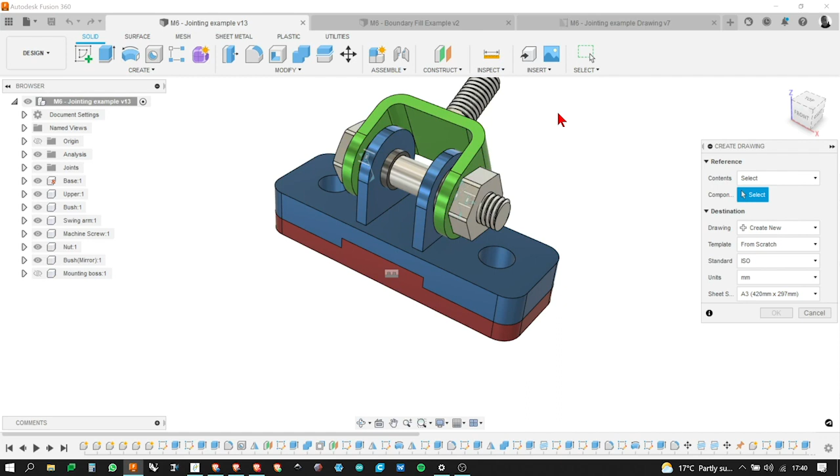So what I'm going to do is click on one of these. I'll click on the blue one to select it. Pretty straightforward how you decide what you want to bring into your drawing. And then in terms of destination, we've got create new, or you can add it to other drawings or a batch of drawings should you wish.

There are different templates. We're not going to look at all of that now, but if you're working for a company and they've got their own template, their own particular way of working with drawings, you can bring in a template at that point. You've got different standards - ISO or ASME, defaults to ISO.

Units, millimeters or inches, and the sheet size. This is quite an important one at this stage, to decide what sheet size you want. And again, it might be based very much on what printers you've got. If your company doesn't, or you don't have access to a large format printer, you may be reduced to using A4.

But if not, A3 is a pretty good one. A lot of printers will do A3, so that's quite a standard one. And I think it defaults to A3, in fact. What you do have, which is quite handy, is two A4s, one portrait and one landscape, which is quite handy.

So I was saying the A4 has got portrait and landscape at this stage, which is quite handy. Top one's the portrait one, so it's length first, width second, or whichever way around it is, portrait landscape. But we'll go with A3 for this one. So those kind of things you need to think about before you click OK.

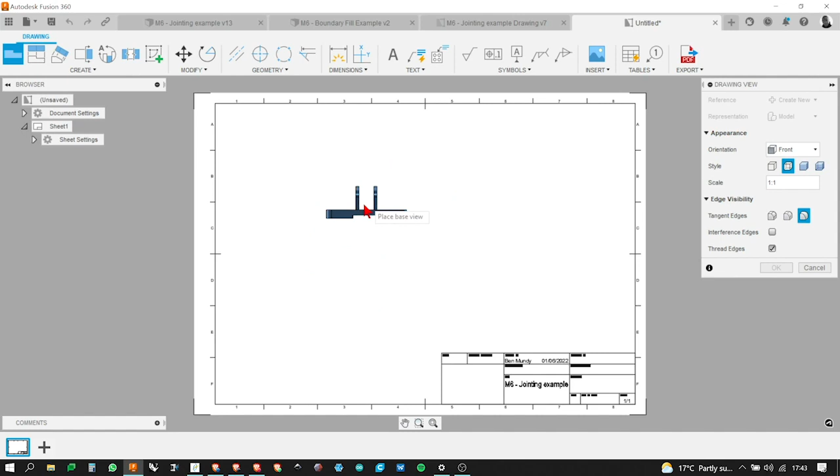But what you get as a first step, you'll get your component sort of floating around somewhere. And basically you can click to place it somewhere that you want. But before you do that, we need to have a look at this dialog box over here.

Firstly, orientation. At the moment it's looking at the front view. This is when we place our first view of a component, we're basically creating a base view of which all the other views will be projected from. So we need to think about what is the most logical view for your base view.

And if you want to change the view, we can change it to a top view, so looking at it top down. Change it obviously to a right left view or a side view. Home view, as they're calling it, is an isometric projection.

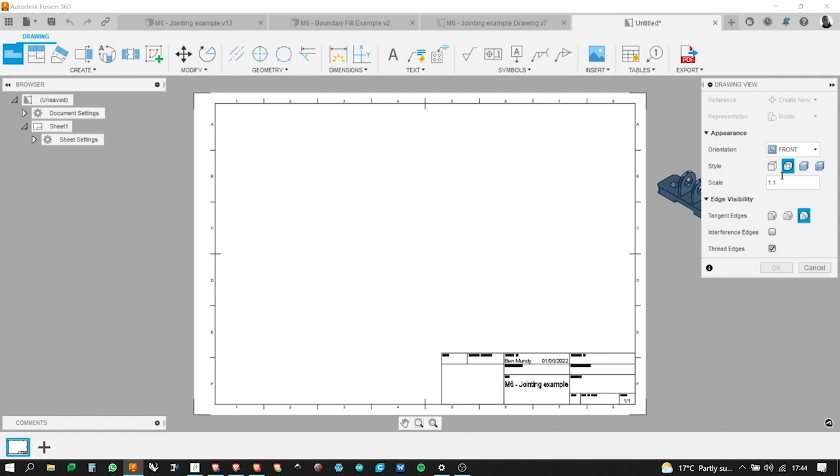Generally speaking, at this stage, you're going to be doing an orthographic drawing. So you're going to have a top view, a side view, maybe a bottom view, depending on what you need to describe the shape. In this instance, I think probably the front view is absolutely fine for this particular object.

Beneath it, we can have a look at these later as well. We've got style. At the moment, it's showing as a fully shaded object with geometry lines. But you can have it as wireframe with hidden lines, wireframe without hidden lines, shaded without geometry, and shaded with hidden lines. Generally speaking, it will default to wireframe with hidden lines, which is kind of what you want for a technical drawing, generally speaking, and that's what we'll go for.

But you can go back at a later date and change that if you want to. So we can change most of this, or all of this, if you need to. The next thing to look at is scale.

So when you're thinking about laying out a drawing, you have to also think about you're going to need space around each projection for dimensions, for notes, information. So you need to think about some idea of how you're going to lay out a drawing beforehand.

But if you want to make it bigger or smaller, we can just go over to the scale dialog box and go to the three dots next to it, and we can change it from 1:1 scale to 2:1 if we want it to be double the size, and obviously bigger, or we want it to be 1:2 and make it half the size. So we can think about the scale of the object in relation to the size of your paper.

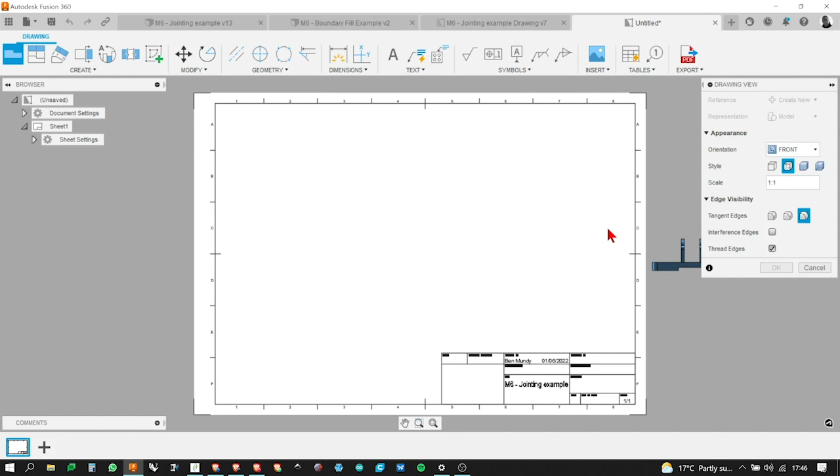Things like tangent edges and edge visibility basically involve removing geometry lines where you don't need them. I tend to leave it to the default of removing unnecessary geometry lines.

Because with technical or engineering drawings, you can get too many lines and it can get hard to look at. So the default is tangent edges, sort of clean with all the geometry lines removed. Thread edges will highlight at this stage, but you can remove thread edges if you've modelled your threads and you don't want that modelling to show up in your technical drawing.

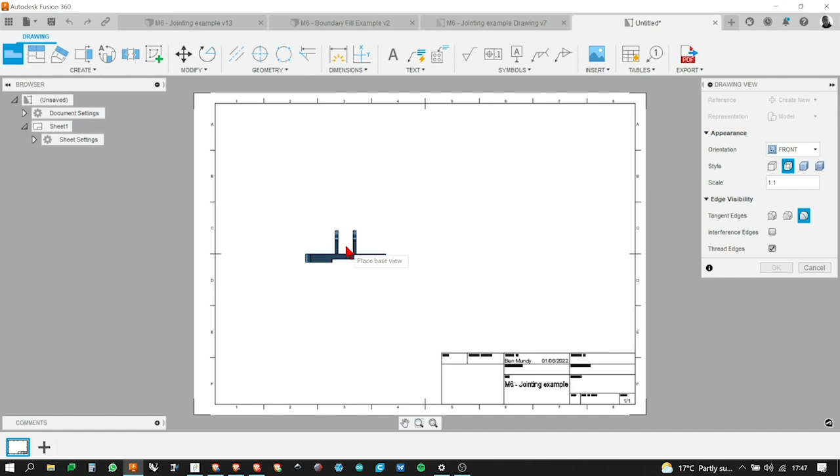But once you've decided essentially what orientation your base view is and what size it is, you can click somewhere on your paper and choose where you're going to put it. You can change the position very easily. Don't have to get it right now, but let's put it somewhere.

So I'm going to click and pop it here, and click OK. So there is our base view. We can see we've got a wireframe representation of the front view, and we can see we've got some dotted lines to show the holes running through it.

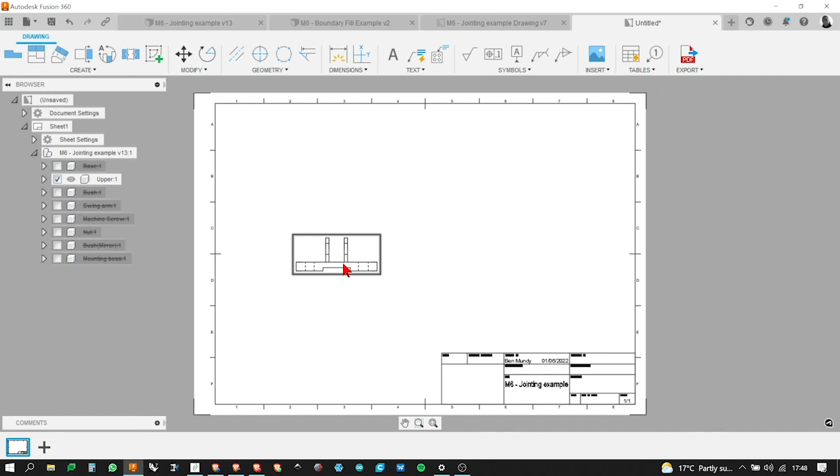And I think these should be dotted lines, but actually they're too short. That piece is too short to show that as a dotted line. So that's a slight thing to be aware of: if you've got a very short line, it won't always display as a dashed or dotted line. Anyway, so that's our base view.

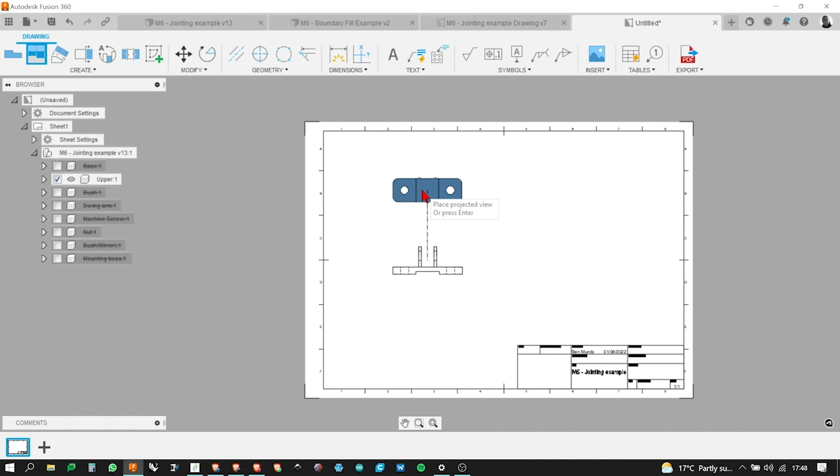Okay, so if you look over here in the Create menu, the very first thing we're doing is creating our base view. From that, we're going to create our projected views. So if I go to the next icon along and click on that, and click on the parent view, the base view, once, and move my mouse, it will take the projected view in the direction you're moving, which is horizontal, vertical, or diagonal. There we go, and it will give you an isometric view.

As you move it around, it will change the view as you go from left to right, top to bottom, diagonally, trying to be helpful. So for this one, I might have a bottom view, a top view, and a side view. I'm going to click once there, move it again, click once there, move it again, click once there, move it again.

And then I might put one of these over here somewhere, an isometric view over in the corner. It's quite handy to have that because someone can instantly get an idea of what the form is. All the information will be in your dimensions and orthographic projection, but it's nice to have that there, so there's instant recognition of the kind of nature of the shape.

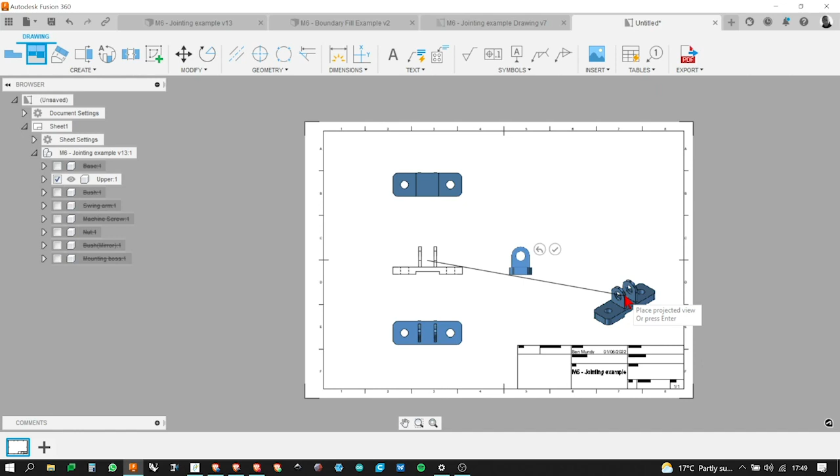So I'm going to click OK, Enter, and then to finish my views, I'm just going to click on the little tick next to it. And then we've got our views. If we want to change the way any of these look, say I want to change this one...

I want to get rid of all the hidden dashed lines because it's a bit complicated to look at, so I can just double click on it and it will change the appearance just for this projected view. I might change it from parent, which defaults to the same style as the parent, to one without those hidden lines, just to make it easier to understand the shape.

You can also make it shaded should you wish, but that will cost money because when you print it, it will be in colour probably. So, and we might take off tangent edges. So here's an example of how tangent edges work. You can see these lines here, hopefully from the back, that describe the radius. You wouldn't actually see them in reality, so you can choose to remove them should you wish at this stage.

So what we can also do, we can move things around. Once you've sort of plonked them where you want them, you might want to adjust them slightly. To adjust any of them, I'm just going to click on it, pick it up, and drag it around by holding down my left mouse button. You can see as I move it around, all of the others will stay in relation, vertically or horizontally, in that projected view.

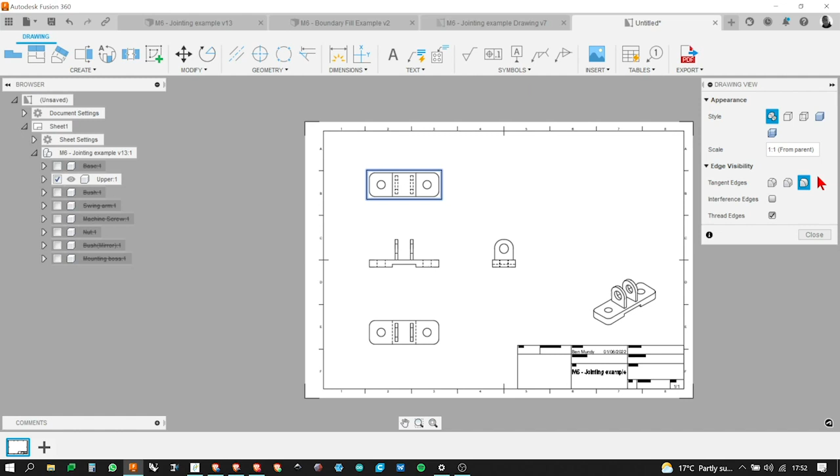So that's kind of just the basics of getting your part onto a sheet. If you notice over in the browser, you can see our jointing example has come in and we've got our upper component ticked. We can actually bring in any of the other components should we wish. If we decide we do want another component in this drawing, we can click on it, and now we've brought one of those bushes in, so we can choose what we want to show at this point should you wish, if you want to do a full assembly drawing.

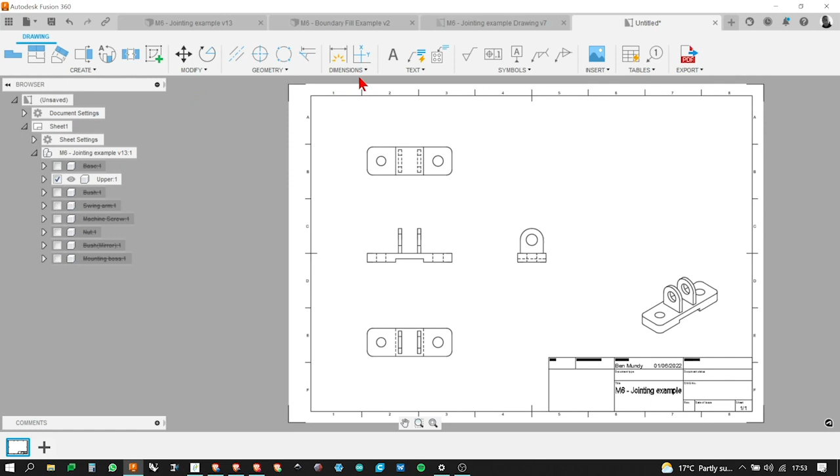So once we've got to this stage, it might be time to start thinking about dimensioning it. We've got lots and lots of different ways of dimensioning your drawings, and it's a bit overwhelming, in all honesty. I'm not going to go through every single way of dimensioning things, other than to say the top one is your smart dimension, and that will try and work it out for you - it'll try and understand what it is you're trying to dimension. That's the one I'm going to focus on, because it's the one I tend to use like 99% of the time. But you can use all of the other ones, depending on exactly how you want to annotate your drawing.

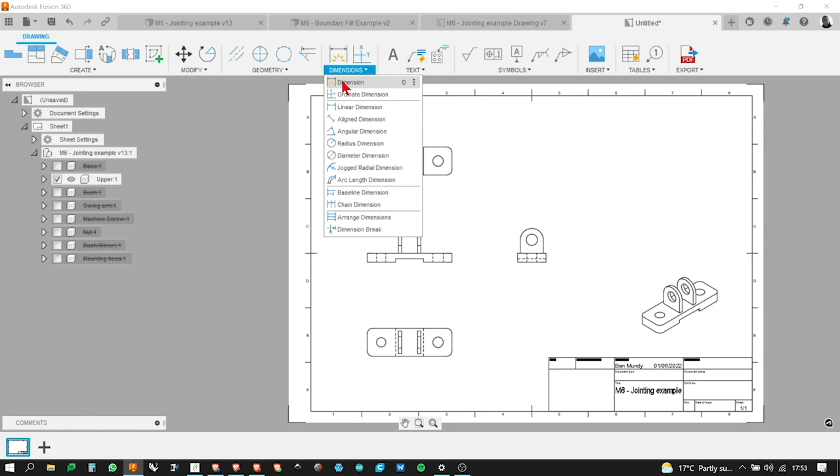So this smart dimension, which is D on the keyboard, I'm just going to zoom in a bit on my base view. To dimension anything, there's basically two ways of doing it: you can either select a line and it will dimension that line, or you can select two entities, two lines, and it will dimension either a length or an angle between them. So for instance, if I wanted to dimension from this point to this point, I don't have to click on here and here, I can just hover over the whole line and it'll pick it up. Well, it might do actually, it's picking up an edge there, so that's a bad example.

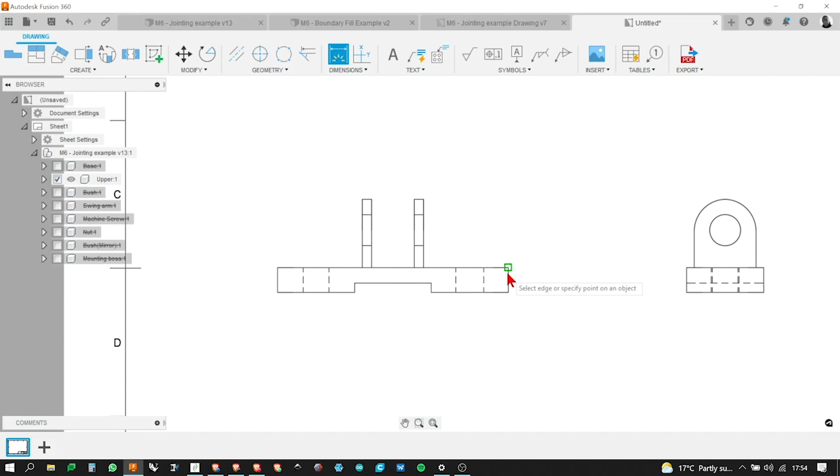So I wanted to do the height of this. I can hover over the whole line and it will pick up that edge, or I can pick up each corner if you want to. So let's just do the thickness. If I click on that line as it's hovered over, click once and move my mouse, then I can move it out to where I want it. We can change exactly where these dimensions sit, so we can get a nice clean layout - we can just start somewhere. I'm going to click again to accept it. We're still in dimension mode, so you don't have to go back every time and click the dimension button - we can just go through and start putting dimensions on as you want.

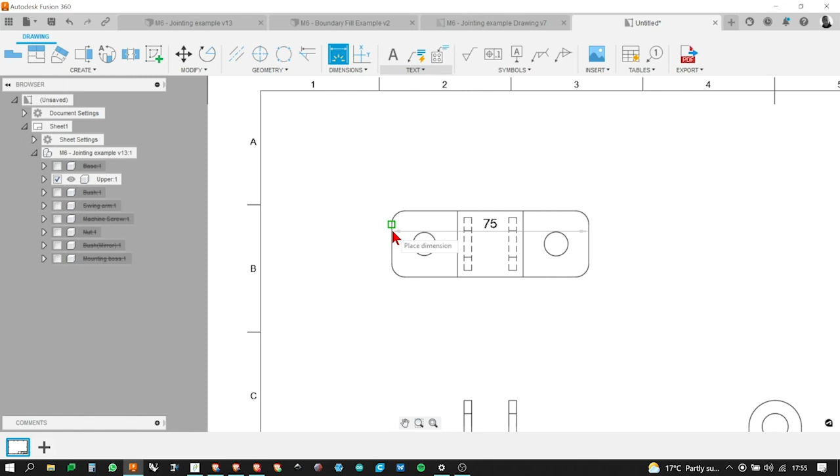So say we want to dimension the width up here. We haven't got a whole line to choose because we've got these radiuses. So I'm going to select one line and click on it, then go over to the other side and click on that, and then move my mouse button up. That will give me a dimension between 2 points.

Click on it again to accept it.

If we want to dimension any kind of radius or arc, we just hover over it and it will understand that you're trying to dimension a radius or arc. So if I click on the outside of that circle, it understands it's a circle, so I need to give it a diameter rather than a radius in this case. And again, whilst you've clicked once, you just move your mouse away and put that dimension wherever you want.

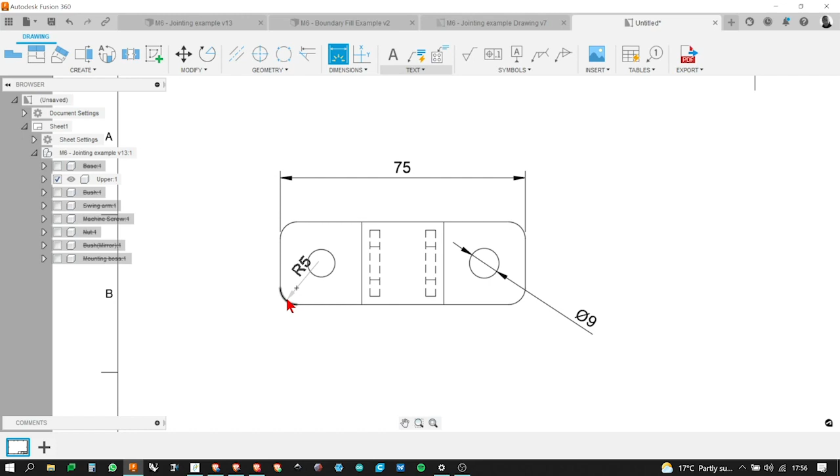The same with any of these radiuses on the corner. Not a full circle, but because it's a fillet, it will give you a radial dimension rather than a diameter. So I'm going to click on that, move my mouse away, put my dimension wherever I want it, and click again to accept it. So it's pretty straightforward, really.

I've discovered that I'm looking at it in a sideline view. I'm trying to measure the vertical height. Because of the positioning of the holes, it's not letting me do this.

So is it this one that you want to measure from there? If you hover over, you'll see a little green box should pop up. You click on that, and then go down so that whole line is selected. And click on that, it should do it.

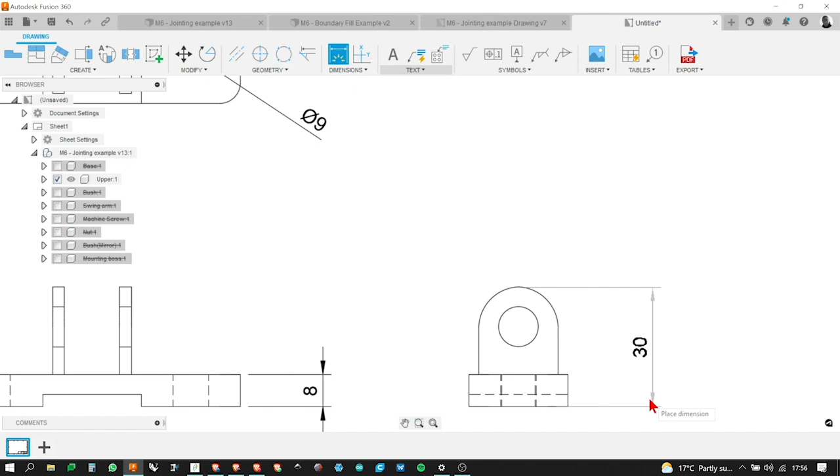So it is, again, trying to be helpful, and sometimes it works. Horizontal rather than... No, no, not that I'm aware of. Is there any way to offset the lines so that they don't touch the part?

Yeah, that's a good question, and not that I've seen. No, it's not. It hasn't got every single sort of graphical feature you could hope for, unfortunately, within this. It's got a lot, but there's certain things it can't do, which is a bit annoying. There are things like AutoCAD, which is really designed for this kind of thing, that will do more in terms of making dashed lines, you can basically make it however you want. This is a bit more basic, unfortunately.

Are you able to change the colour of the text? Again, I don't think so. Having looked in the preferences, I can't see it. Not that I'm aware of.

If you double click on any of the dimensions, we'll get our dimension dialog box popping up. It's worth mentioning one particular thing about this: the linear precision. It'll go down to a 100th of a millimetre as a default. But if you want to change it to a 10th of a millimetre, or whatever, even a millionth of a millimetre, you can alter the precision.

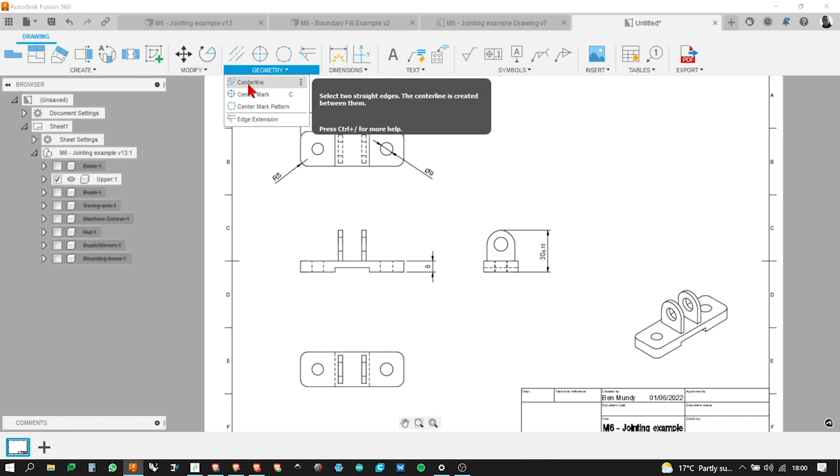So to do that, I'm going to go up to geometry. If you look at the geometry menu, we've got center line, center mark pattern, edge extension, things like that. I'll go through these, but the first one we're going to look at is center line. So if you want to put a center line between these two, very simple, you just pick the two lines you want the center line between, and they have to be parallel lines. I don't think it'll work on an angle or on a curve. So I'll choose that one, and it creates a center line, which is a long dash and a short dash - that's the standard style of a center line.

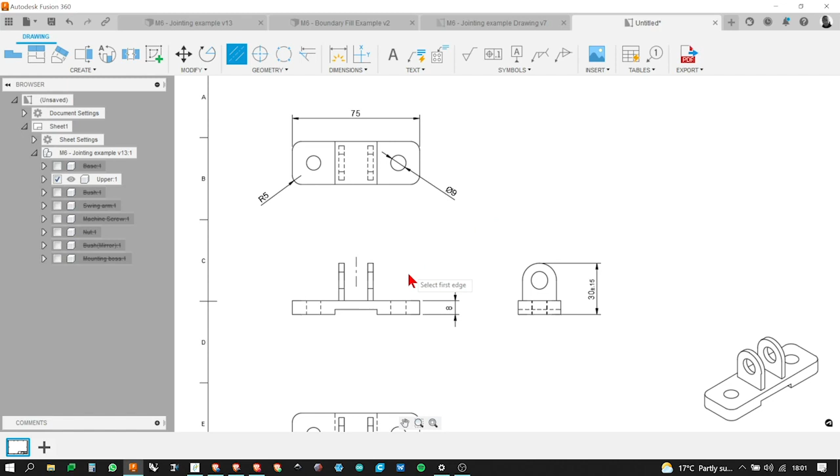So now I can put perhaps another center line from this one to this one and pop that in there as well, just to make it very obvious there are center lines. It knows that you've got them and you drag them out using the projection. It knows the center line runs the whole way up, but it's whether you want to show it - you might not want to show it, you get the choice of where you want to put it. You might not want it running all the way through, it might get in the way.

Oh yeah, sorry. No worries. It is being recorded, so you can catch up on the first half hour or so.

How do you remove a dimension if you put in an extra one and just want to get rid of it? Just hover over it so it goes black, click on it, and then hit the delete key - pretty simple. Ah okay, I think I'll click on something else.

I want center line. You can also right click on it and there's delete as well.

I have to say, I use Technical Drawing Workspace for perhaps two clients that still like to work this way. I've worked wholly in 3D for about the last 15 years, so this is really just for those people that need this and work this way. I'll do pretty basic technical drawings just to get exactly what I need across, but for those wanting really complex ones, I think this will go so far - if you want to take it into AutoCAD and add more, you certainly can, and I'll show you how to export out of this into something like AutoCAD. There are a couple of little quirks you need to know if that's something you're interested in doing.

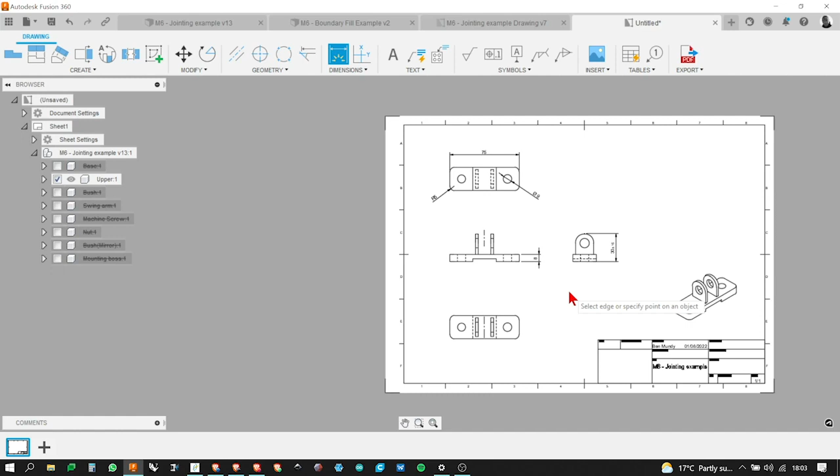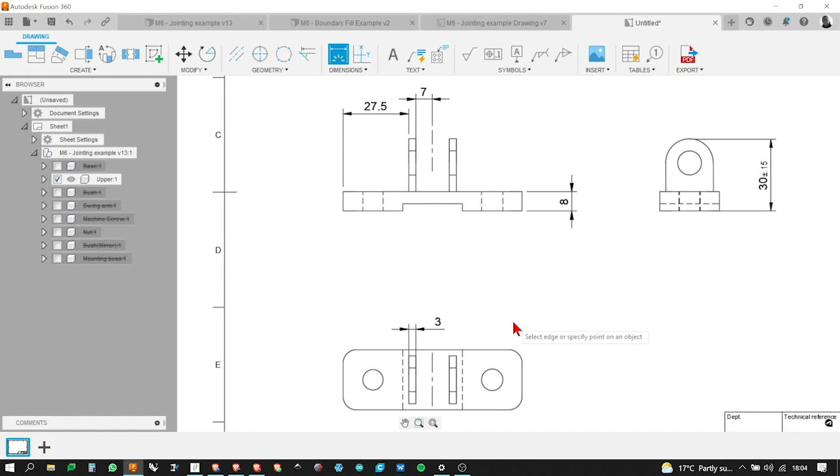I'm not going to work my way around and dimension it all, but I'll carry on showing you how this mirrored element might work. I'm going to dimension up some things on one side - I'll put in a dimension between this one and this one, and maybe a dimension between this one and this one. What I might not do here is force a dimension in for the thickness of this piece, because it's going to get hard to see with lots of dimensions overlapping each other, so I might dimension this one down here. I'll just put one in over here, and then you can see the position of this relative to the center and the width there.

Technically speaking, I could remove one of these dimensions if you're being mean - and this is what I was talking about. We know this is 75 millimeters, and we know this is the center line. We know this is 27.5 millimeters, and we know that this is 7 millimeters. We don't actually need to give that dimension because they could work it out. That's probably being a little mean, but if you're being really proper about it, you might not put that dimension in.

Looking at it from another point of view, if you've got the dimension on there and you've sent it to somebody to manufacture and they get it wrong, they can't say you didn't tell me what that dimension was. No, but you can say you had all the information that is there. But you end up with a fight then.

Yeah, I know, and I'm probably coming from the point of view of a really pernickety technical drawing teacher I had back in the 70s or the 80s or whatever it was. So yeah, I would always over-dimension if anything, just to be helpful.

And what I might also do is pop a dimension down here on this one over here. Might put that over there because it makes more sense. I could dimension the same thing there to there if you wanted to, but I tend to dimension holes from above.

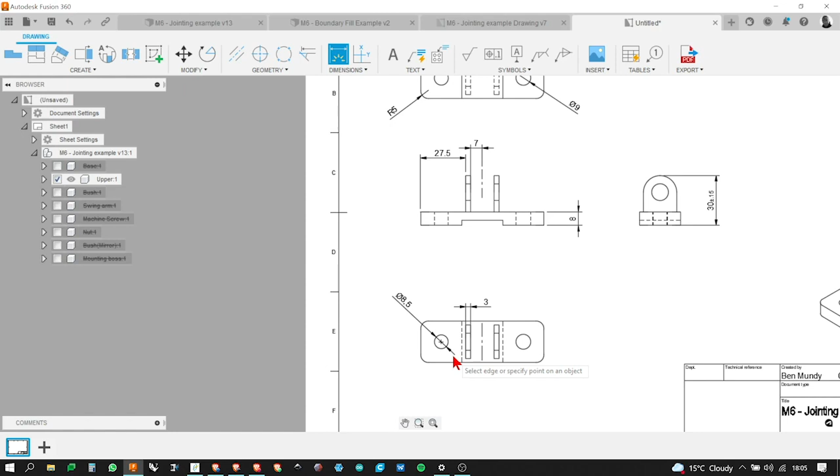And then I might also put a dimension in from here to here. Maybe let's bring it out. Put a dimension in there to there, like so. And the last thing I might do is pop a dimension over here for this hole here.

And we're beginning to get there now with dimensions, but what we haven't said, although this is a center line, we haven't actually explicitly said that this is mirrored, because this could be a center line between these two, and this bit could be longer. It might be only a millimetre longer, but it might not be visually obvious.

So I would perhaps annotate with a note at this point: entire object mirrored around center line, just so it's clear that all of these dimensions relate to this side as well. So if you want to put notes in, we've got a text menu at the top here.

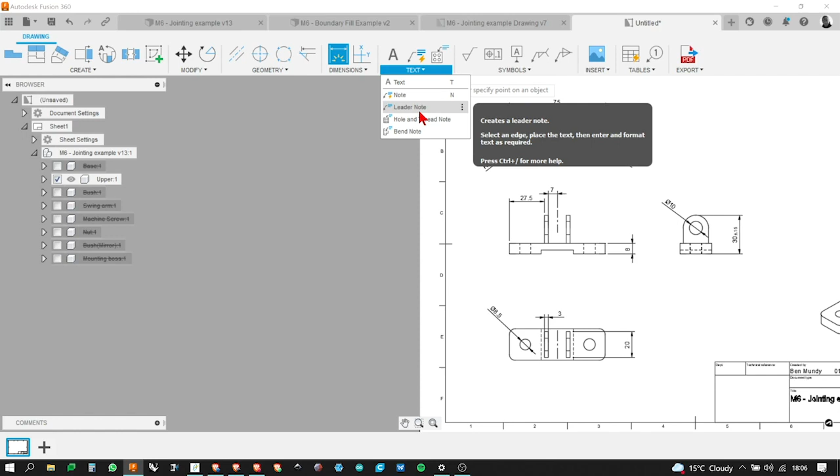We can just put a random text box in anywhere and start typing away, which is handy. But we can also put in notes and leader notes, and I'm never entirely sure about the difference, I have to say. Something I need to find out more about, but let's just put a note in.

Automatic, so it tries to work out what you're trying to do and work it out for you. Let's leave it on that.

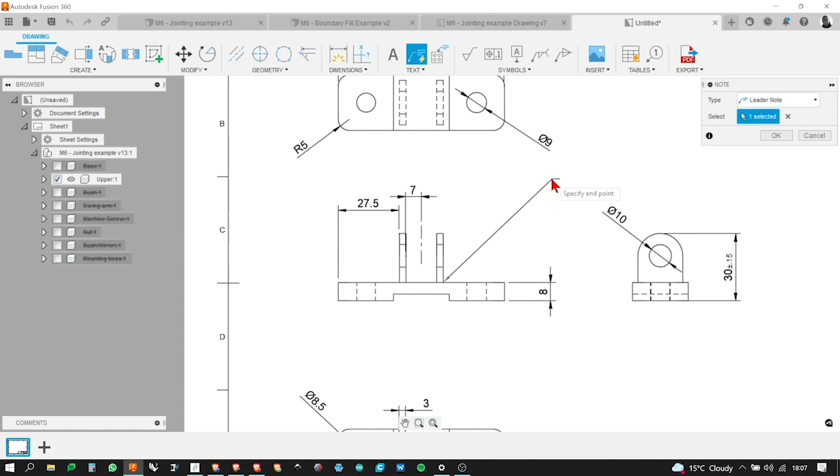And I'm just going to select anything. I might select here just so it's pointing to the object. I'm not trying to select any particular thing. So leader notes or notes are very good if you want to point to something. You might just want to put this in a text box, but you could also put it in a pointed box or a leader note.

And then we can type in 'object mirrored around centreline'. You can type in whatever we want, we can change the text, we can use all the usual things that you can do with text, right, left, justified, size, bold, italic, underline, whatever you want.

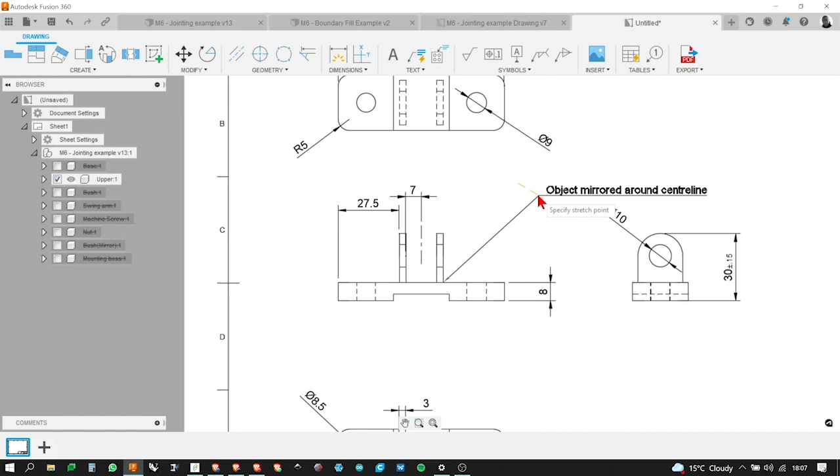And there's symbols down there as well, should you need all sorts of symbols. And then once you're finished with that, it's on close, and you've got a leader note or a note which directly relates to a particular thing. It's obviously got your arrow. So that's a really handy thing to know how to do.

Having created text, you can edit it, can't you? Should be able to double click on it. Double click on it, swipe it, change it, do what you want.

So dimensioning, text, notes, hopefully pretty straightforward. But if you want to, there's other functionality in the create menu which is really useful. So you can section things, so you can chop them in half and open them up and section them. You can zoom in on things. You can put breaks in things, so if you've got a really long object, you can actually put a break in it and shorten it with the standard notation of a break.

And you can also do, which is I think quite a new one, auxiliary view. So if you've got an angled object and you want to have a projection from that particular plane or face or surface, you can have that angled view as well.

I thought I'd show you a couple of the most useful views, the detail view and the section view. The detail view is really useful because it means you can zoom in on a bit of it and have it at a different scale, which can be helpful for describing certain things.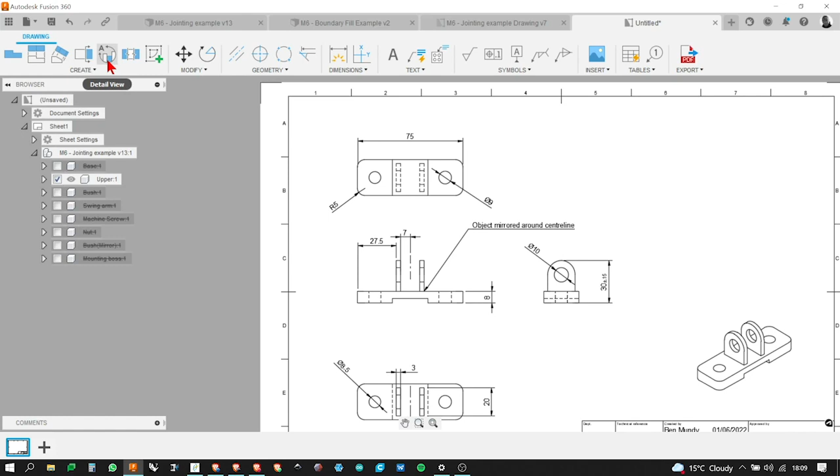I'm going to do a detail view by clicking on detail view, and it's asking select parent view, which is the bit you want to detail. I'm going to detail the side view. This one doesn't really need a detail view, but let's suppose that it does.

I'm going to click on that one, and then you need to pick a center point. What it's going to do is create a circle around the center point, and it's going to zoom in on that part of the drawing.

If you hover around, it'll snap to things, trying to be helpful. I'm going to hover to the midpoint of that top face, click once, and drag out my circle.

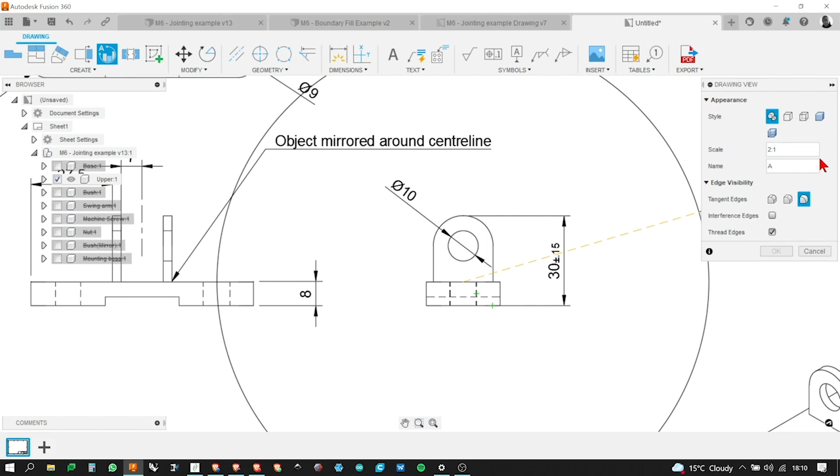Now you can have this as big or as small as you like. I'm going to make mine this kind of size, I think. We've also got different scale sizes over here, so we can expand this view to whatever size we want. I'll stick with 2:1 for now.

When I click another time, we've got our detail view coming out. We can put this anywhere. It doesn't have to be in line with our side view and our front view. We can put it wherever works within our layout, so we've got space for it.

I'm just going to put it over here and click OK. What you can see here now, we've got the circle of our detail view, we've got A next to it, and A in brackets with the scale that detail view is. So it relates - that's the detail view, that's 2:1 - and then you can start dimensioning it or put notes or whatever you want at that detail view.

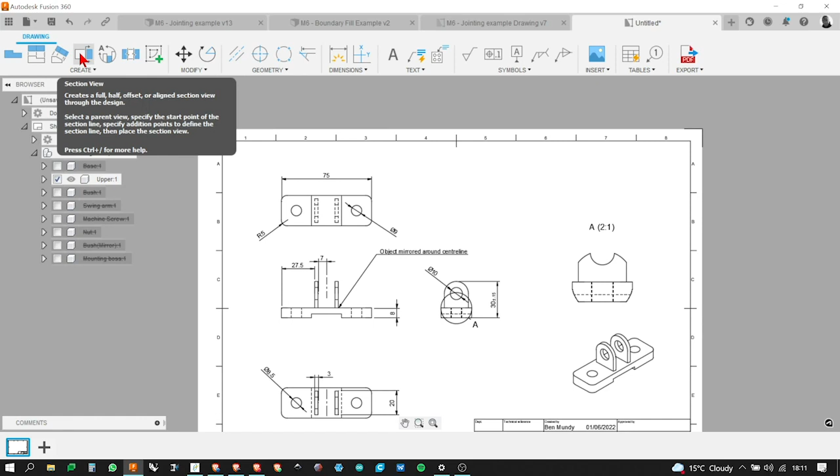If we want to chop something in half, we can do a section view as well - that's the next one along. If I click on that one, again it's asking us, what do you want to chop in half, what do you want to section?

I'm going to go for the top one, click on it once, and now it wants you to tell it what line you want to chop it through. It can be straight across, diagonally, whatever you want it to be. You have to specify a start point and end point for that line to chop it in half.

That makes sense. So I'm going to click up here at this midpoint - if you remember, a triangle in Fusion always represents a midpoint, so we know that's the midpoint of the part. And I'm going to click down here on the other midpoint, and then click OK.

Now this time this is a section view and is projected, so it's not like a detail view. Because a detail view has got bigger, it doesn't make sense to project it. But a section view, you would still project.

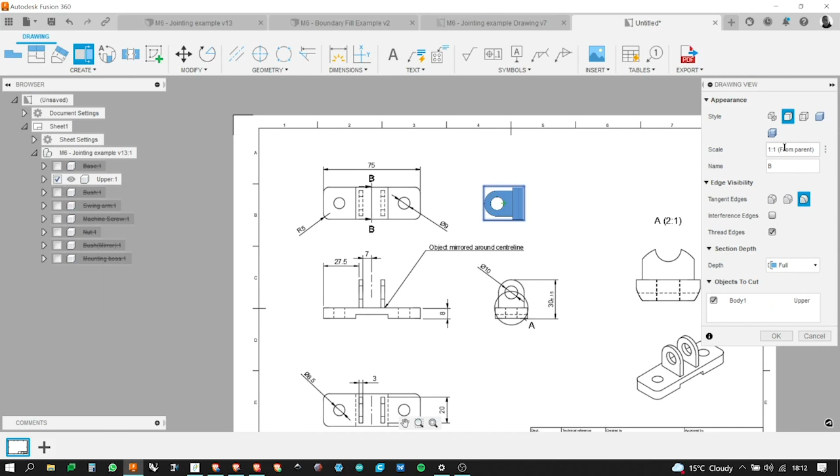Basically what it's doing is chopping, and we can change the scale if we want to. It's chopping the component in half around this point here, and we are looking at this part here. The bit that's been chopped through has been hatched - you can see that's the bit, and that's the section view from that point.

And again, we've got B, the section view, and B at one-to-one scale, so you know which bit relates to what.

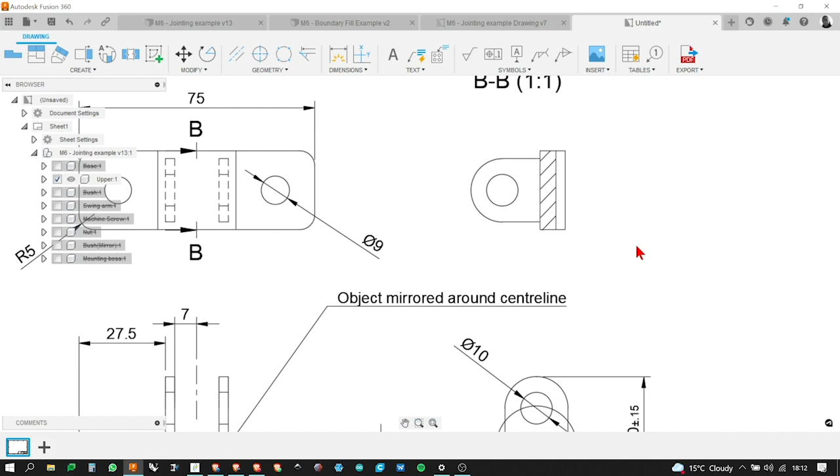We can move these around, pick them up if they're a bit too far away, and we can click on anything. Oh, that's interesting - we can choose the type of hatch pattern. I didn't realise that, that's quite cool. Didn't know that, that's quite useful actually.

But you can double click on any of them and go back into the drawing view to change the appearance and change the scale, just in the same way you can with any base view or any of the projected views.

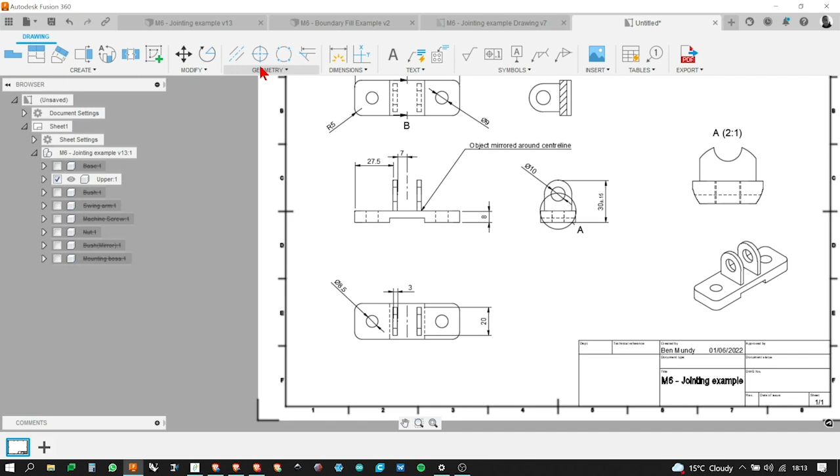Other things you can do to help dimension things - we've got a couple of other really useful features in our geometry menu. If you want to get the center point of a circle and dimension it, you can hover over it and pick it up quite easily. But if you want to mark that center point and make it visible, go up to geometry and put in a center mark. It will take any circle or arc and show on the drawing where that center point is, which might be useful.

Presumably that's good if you're going to print your diagram, glue it on top of something, and then line up a drill bit. Yeah, really useful for something like that, absolutely.

Another really useful little feature is edge extension. So if you've got a curved element and you want to show where the straight lines that make that curved element meet, if that makes sense - really handy. With edge extension, I can select one edge, select the other edge, and it will show where they meet, and you can pick it up. Just useful stuff, really.

Something to bear in mind about what you just said - if you're printing something to a PDF and then printing that onto a sheet of paper, make sure the page scaling in Acrobat is set to actual size. Yes, because Acrobat defaults to fit it to the page with margins, and then you get stuck with the wrong size. Very good point. Yeah, it's easy to get caught out like that.

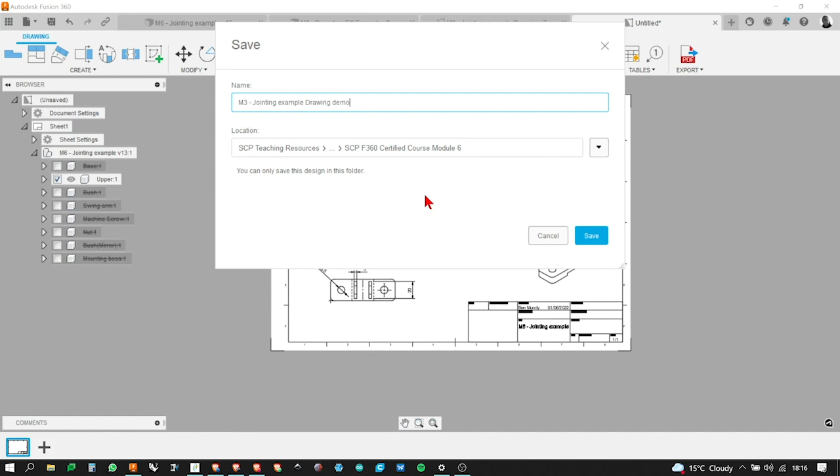So I'll click on save now, and I'm just going to go back. Now if we want to make a change to our design because there's something we've decided we got wrong - because actually there is something wrong here. This circle, I believe, is in fact 9mm, and the one on this side is 8.5, so there's a mistake.

So I want to go back and change it. I can't do that in the drawing - the drawing just describes what you've created as a model. I have to go back to the model. So if I go back to this model here, we can see that 8.5, 9mm - that was a bit dopey. So let's pick up that sketch, find where that sketch exists, and edit the sketch.

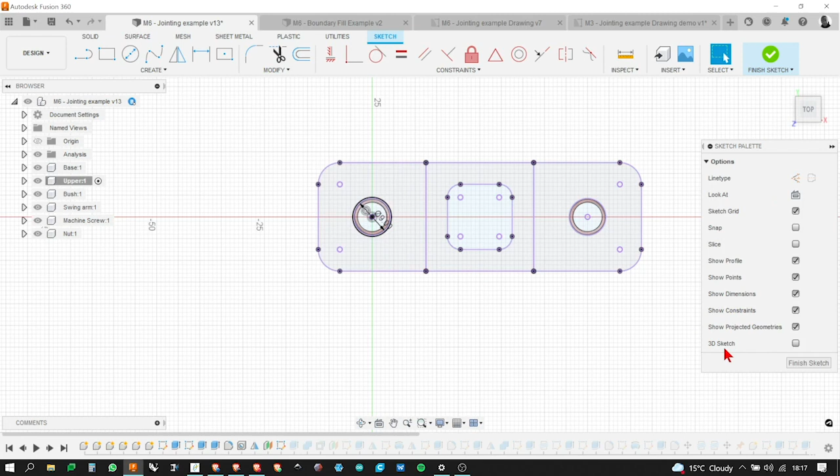I'm not going to fiddle around with it too much - just flatten and extrude the bigger size. So now that is 9mm, that one will remain as 9mm.

Now, for it to update to the drawing, you have to hit the save button - otherwise it won't update or change the drawing. So I'm going to hit the save button, and I'm going to create a new version at this point.

Now if I go back to this drawing, we will have a warning: changes have been made to a reference design. Basically it's saying something has happened to the design that this drawing is based on. It hasn't automatically updated - as you can see, it's still 8.5 here, not 9mm. To trigger it to update the design, it's the same as when you're bringing in a part, deriving a part, or linking a part from something else - we have to go up here and click this icon to update it. So I click on that.

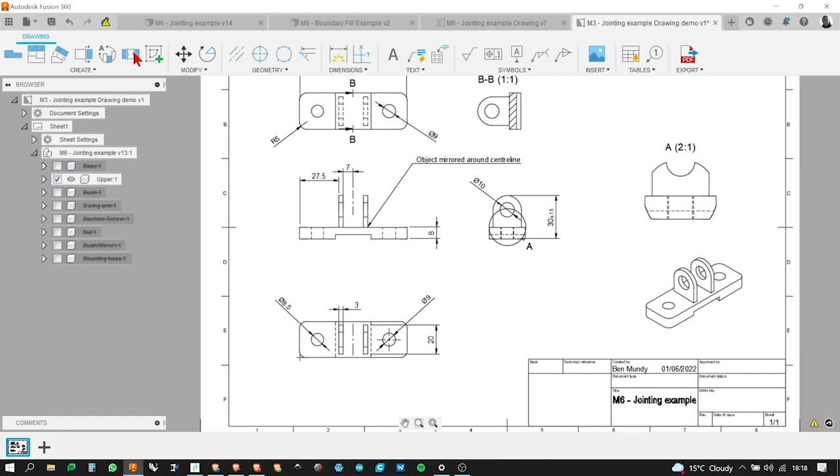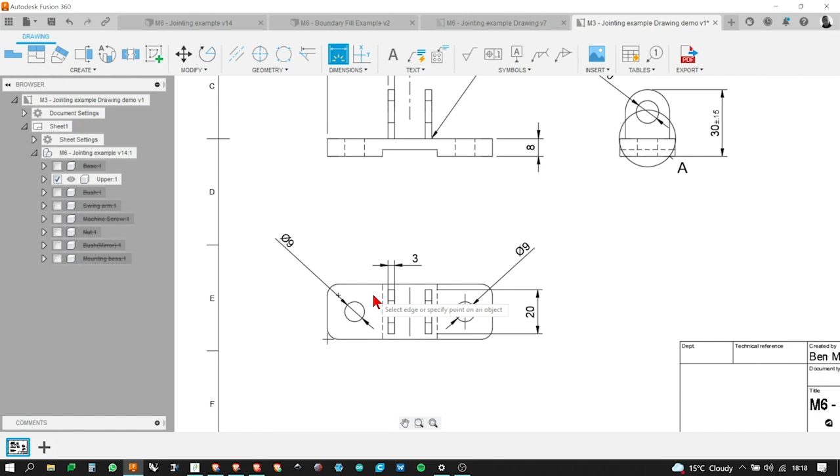That's interesting. I would have thought it would just update it. I might have to delete and redo the dimension. That's a bit bad - I thought it would just update the dimension rather than giving you a warning. I guess it's showing you where the change has happened, maybe. But the point is you can go back, change the design, update it, and then it looks like you have to sort out the dimensions that need changing, which I don't think it used to do. Anyway.

So, there's that element. Another thing to have a look at, which might be of use, are BOMs - bill of materials, parts lists. It will automatically create, it's quite a basic BOM that it will create. If you're using this kind of stuff all the time, there's quite good add-ons within Fusion for more complex BOMs. You can go to the Fusion store, and I think there's a couple of different add-ons if you really want to get into your BOMs, which you can use, but I'll show you the basic BOM, or table as they call it. I always call them BOMs.

Lots of different types of tables, and I'll be the first to admit I don't know all of them. I just know the basic BOM, I have to say. But you can investigate all the different types of tables. It won't be in the exam - there's a little bit about drawings in the exam, but it's pretty basic.

So the table, to create a table, I'm going to click on it. You can pick all your different types, but it'll just do the standard automatic type if you don't move away from the default. Basically, we can choose where we want to put our BOM - we can snap it to an edge, the edge of our border, should we wish. Let's do that, makes sense. I'm going to click that.

And it will pick up all the information that it has about the part. So it's item 2. The reason it's item 2 is because it's actually item 2 in our overall assembly here. If we didn't have it as part of an assembly, just modeled on its own, it would be item 1, so there's only one thing.

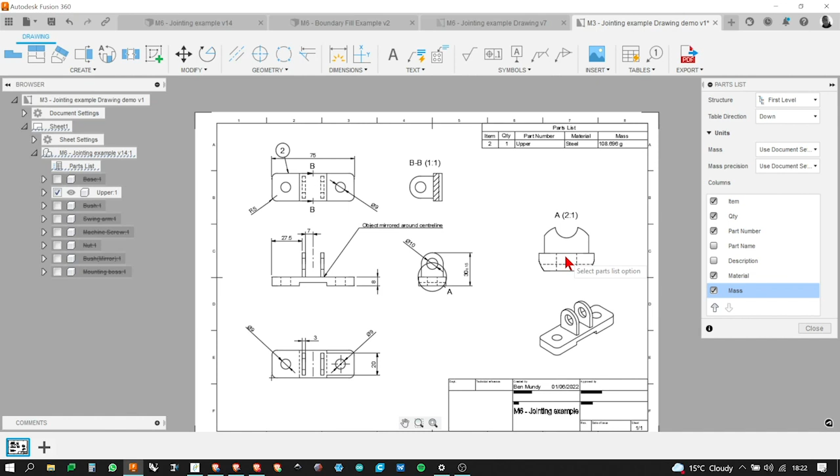However, if you've just got the personal use version, you can only create a single sheet in it. Oh, really? Yes. You can create as many drawings as you like, but it's only one sheet per drawing. So you can't add another sheet down here? No, you don't have that plus sign. I've got plus, but I can't - nothing happens. There are, within technical drawings, a couple of other really annoying restrictions when it comes to technical drawings if you've got the free edition, which I'll come on to later, and they are really annoying. The way around it is that you just create multiple drawings and they're saved as separate files, and they still will update from the master. But I guess those become one of your 10, do they? Yes, they must be.

It's like they do want you to pay for it. Really irritating, it's so expensive as well, isn't it? Yes, so on this... yeah.

So how did you change... how do I go back to the sketch and then change the dimension of something? Because it was saying that I was over-constraining it. Oh right, yeah, sure.

All I did with this was find out where the problem might be. You can just select by clicking on it, and it will show you down there in the timeline. So I've clicked on this, trying to find out where I need to go in my timeline to change it without... sorry, I'll skip through it a bit quickly. Trying to work out which component it was in, blah blah blah.

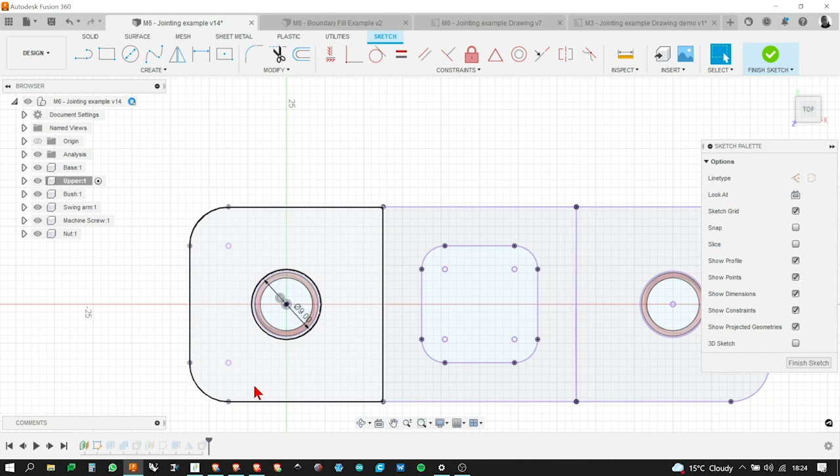So then you can right-click on that sketch, edit the sketch, and make your change. If you change something in the sketch, remember you're going to have to go back and select that change in the extrusion. So if I were now to change that to say 12 millimeters, make it really big, and finish that sketch...

Oh, it has done it. Okay, didn't think it would update automatically, it doesn't always. Oh, that's because I added a circle - that's right, the first time. I just changed it, sorry if that was confusing.

But now, once you've saved that and you go back to your drawing, you just have to hit that update triangle, that warning triangle. Or to go to that again, Stephen, or is that okay?

What? I'm having trouble with it when I'm clicking it. It's not changing. There we go.

Mine just looks totally different to this.

So all you need to do is go to the upper component, and if we click on that, you should see it looking like that down here. We go to the sketch that drives that feature, and right-click on that to edit it.

Then what I did was, rather than try and change the circle that was there, because it's a projected circle - and we know that because it's purple - I just drew another circle.

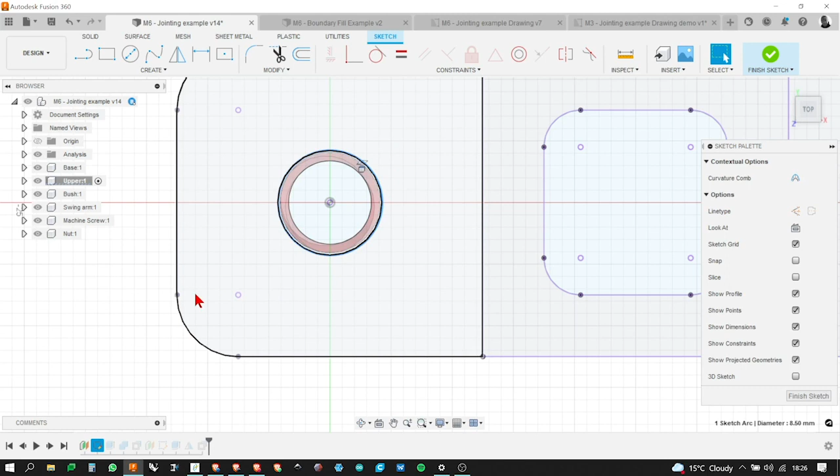You go to edit sketch? Cool, so hopefully you should have something that looks like that. So I just went to create circle and just created another circle.

Of 9mm. The reason I didn't try to change that circle is because it's projected from something else. I could go back and do more detective work to find where that was from, or I could be lazy and not.

So we've got a 9mm circle now, and when you finish that sketch, once it's disappeared altogether - that was the sketch we were working on - we now have to go back to that extrusion and edit that.

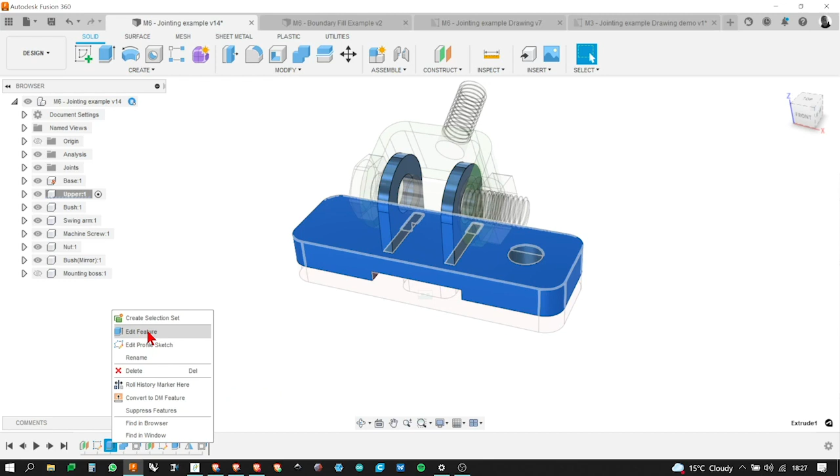Right-clicking on it and clicking Edit Feature, making sure we select both the inner and outer circle. And then click OK.

Is it not working for you still? Okay, fair enough. Yeah, no, it won't move my marker back along now. So okay, don't want it to do something else. You can unpick it maybe later on.

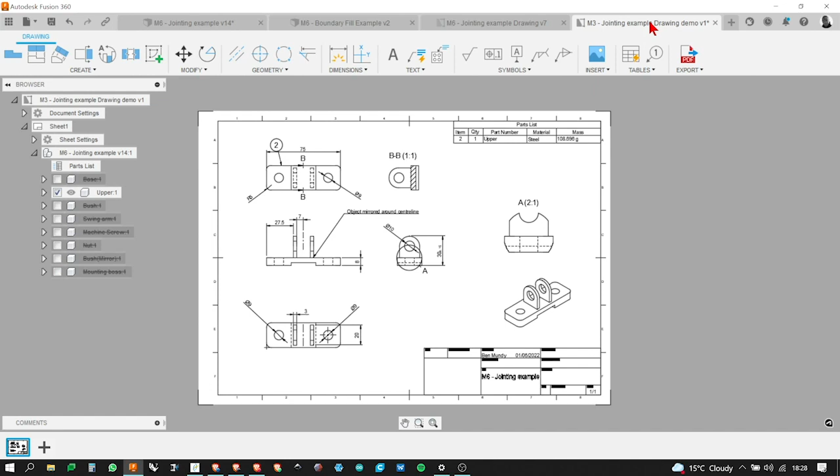Other bits and bobs to mention about the technical drawing environment and layout. We've got the border itself and the title block, which are just the defaults, but we can change both of these should we wish. Looking at the title block first, this is the standard one that Fusion brings in, and it's filled in who created it, the date, and given it a title. Sheet 1 of 1 because it's on one sheet.

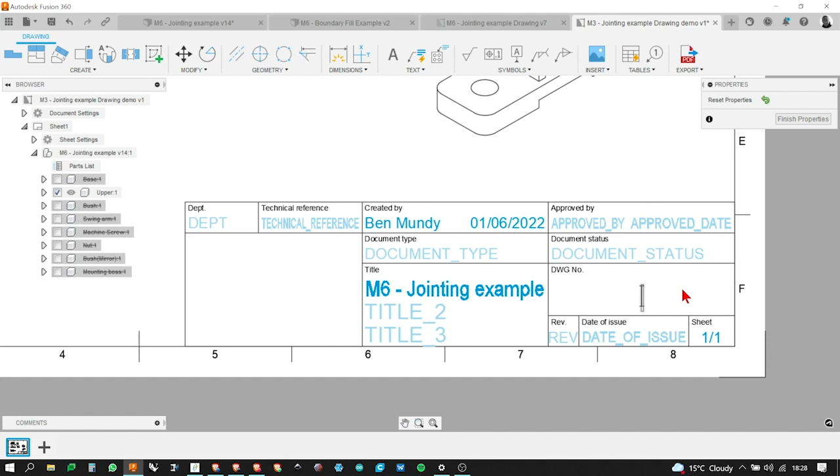We can change any of this. If I double click on it, any of the text, we can delete any text we want, we can add any text, and these are just suggestions, these light blue elements. We can click on it once and change the drawing number, whatever we want. Pretty straightforward, hopefully. We can put in any text we want and change any text very simply just by clicking or double clicking on any of the text.

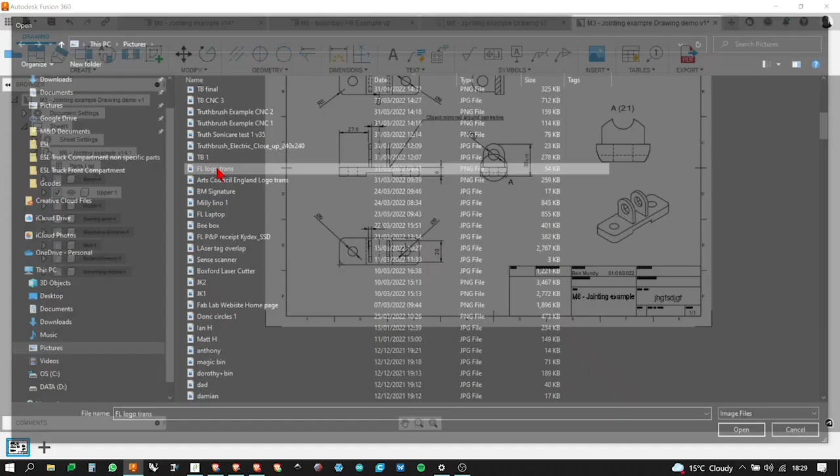We can also, should we want to put on our logo, our company logo, insert an image and put it anywhere. We might want to put it in our title block. Oh my goodness, I should really put the new university logo in, shouldn't I? But I'm not going to. And there we go.

So we can insert an image just in the same way we insert a reference canvas. It's exactly the same kind of thing. We can scale it up, move it around quite simply. Very straightforward, really.

And then we can also save this setup as a template as well if we want. You can save it as a template and then open it up as a template from your files, so you're not having to do that every time.

If you want to edit... good question, I think I'd have to look into that actually because I never do it. Drawing templates, here we go. I know we might have to do it right from the outset. I think I've never done it, I'm afraid. And set it up, then save it. That was a bad example. Sorry, Helen.

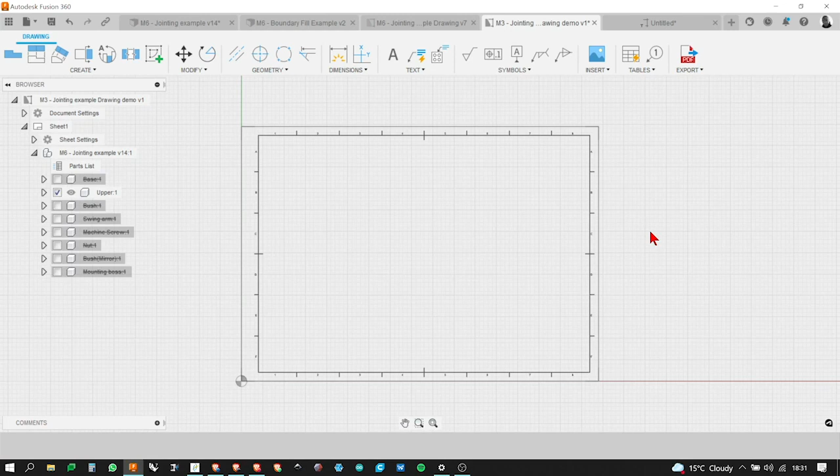In terms of changing the title, the border, again, we can double click on that. We can click on it once, right click, and edit border. It will take us into this kind of sketch environment where we can change line widths, sizes, we can do all sorts of things to change the border as well, should you want to. Again, I've never bothered, I've always gone with the default. But you can do the same thing with the title block as well. You can draw your own one on this basic 2D layout, should you wish.

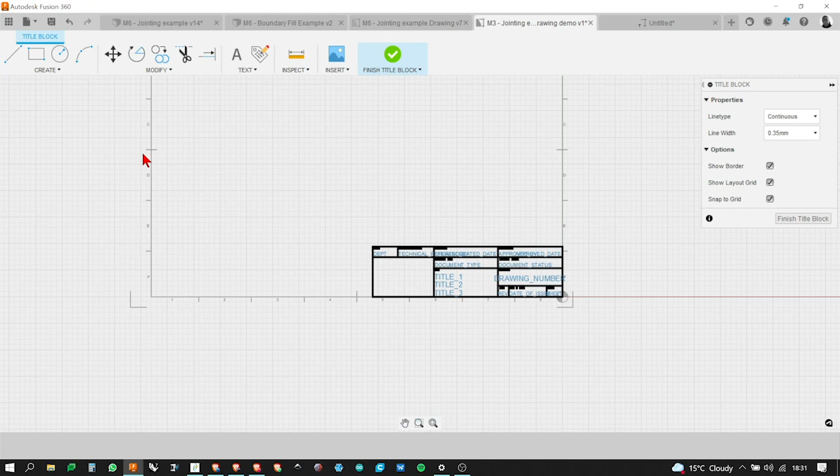Again, click on it once, right click, edit title block, and it should bring you into, yeah here we go, into the same workspace. It's a bit awkward. So you click on it to select it, right click, and then move down to edit title block.

It's a bit annoying because if you just right click, it doesn't do it. So you click on it once to select it, it turns blue, then right click on it, and then edit title block. If you right click on it where it's black, that's what you'll get. If you just hover over it, whilst hovering it's black, you click on it once with your left mouse button, and it should just turn blue.

That's strange, it should work. Well, just try clicking on it once. It might not turn blue, but click on it and then right click. It is a bit awkward, I have to say. There's too many right click menus going on. Why they can't just have it on the standard right click menu, I don't know.

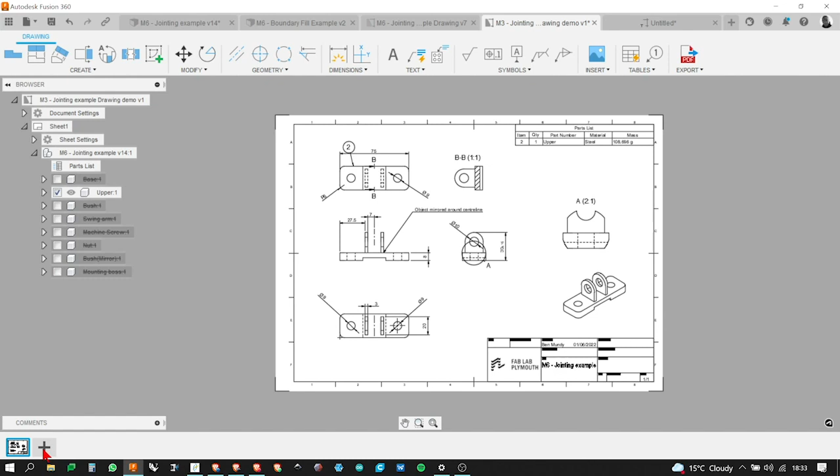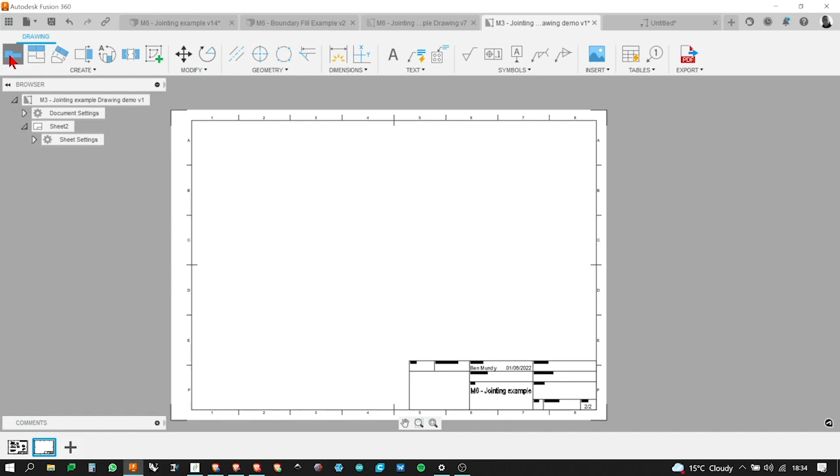And then we're presented with, same as before, the same drawing size. We've now got drawing 2 of 2, or sheet 2 of 2. It's completely blank and it hasn't given us a base view to start off with, so we need to actually go over and click base view to bring that in. What it will do here is bring in everything, and you can again choose what you want to show.

Again, we can set the scale however we want, and the views. At this stage, I can't decide what I want, I can't just select something - I've got to bring everything in, and then deselect what I don't want. So if I click once here, and click over here, now you can see all of our components are being shown, and I can choose the next component by deselecting the ones I don't want. So if I wanted to focus on just the base view, I can turn off all these other components, and we're just looking at that one now.

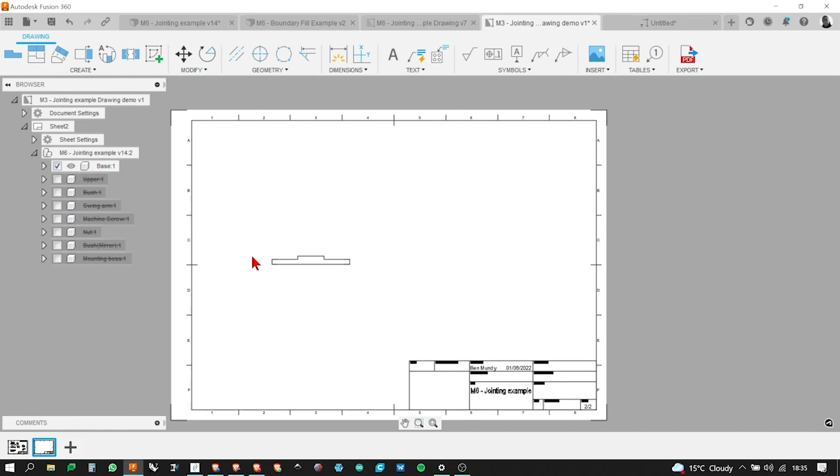Let's go back. So base view, it should bring in everything like that. I'm just going to make mine 1 to 1, click once and put it somewhere, click OK. And it should come up with... yeah, cool.

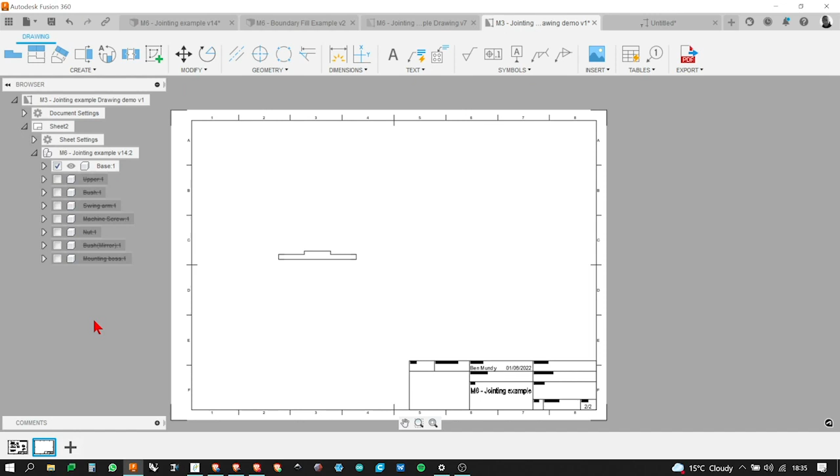What if you have something where it's got 100 parts? Do you have to do that every single time? Yeah, that is a tedious way of doing it. I haven't found another way, because when you start a new drawing you can select what you want, but that's what seems to happen when you create a new drawing at this stage. It might be that you can hold shift down and deselect all of them at once, as it were, I would have thought. But yeah, you're right, it does seem a slightly tedious way, but I should imagine you can probably...

You alt click the one you want to keep active, and it will turn all that stuff off. That'd be nice, wouldn't it? Or if you can do the right click isolate thing, like you do... there you go, suppress all except selected. There we go, right click menu.

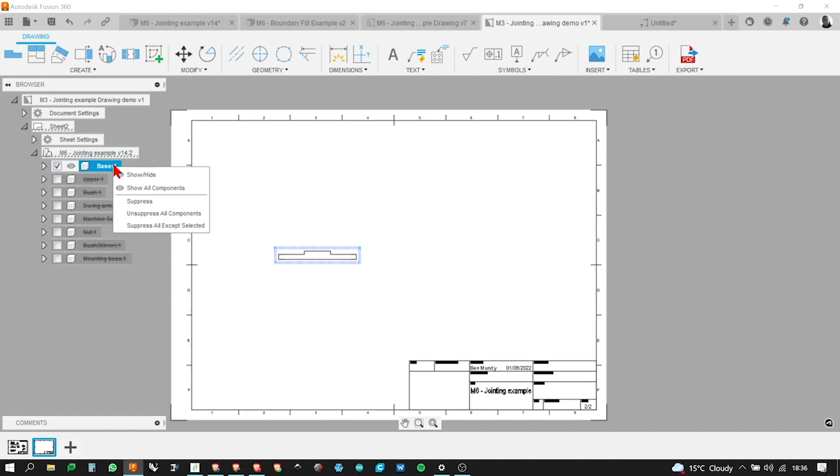When you very first went from the design to the drawing, did you select beforehand the one that you wanted to bring in? Yes, I'll go over that bit again in a second. Yeah, it's a bit easier when you're coming straight from the design. But yeah, right-click menu comes to your rescue again, so you can suppress all except selected, which is ideal, obviously.

And so obviously you can create a book of drawings or a range of drawings, depending on how everyone works, and it's all stored within one document. I'm not sure how to create a template for the border and title block, but when you create the drawing, one of the options there is template, and there's a drop down, and you've got from scratch or browse. Yeah, so you must be saving it once you've created that template - it'll save it locally. And the browse bit is greyed out for me.

Again, that's a full version only feature. So I guess they're thinking mostly you're only going to be using this if you're sending this off to engineers to get stuff made, and you're probably not going to be doing that as a hobbyist, but it's a bit mean, isn't it, frankly? It's beyond the hobbyist thing, because the free version is for everyone that turns over less than 100 grand a year, which is quite a lot. They could just make it a full version for everyone, but just make it like 30 quid. Pull more people behind it.

I agree. So mostly it's the only real workspace, and there's a bit in generative design which is a bit more specialist - you can understand them charging for that, maybe, but this does seem a bit penny pinching, I have to say. The other really annoying thing you can't do with the hobbyist account is you can't export, which is just horrible, frankly. You also can't use their cloud rendering thing as well.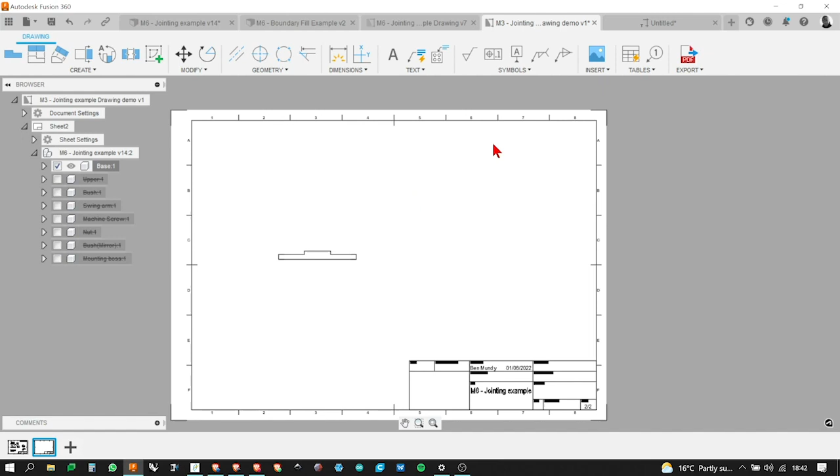I had a question about when you do a move copy in a drawing in sketch mode, can you change the kind of point that it's moving or copying from? Do you know, like it comes up with this kind of... Yeah, I do indeed. And so doing something new, it's a real pain trying to get it to line up because the drawing is like on a scale of, you know, 10 meters.

Sure, okay, let's just see if we can recreate something.

So let's go to move copy. Over here we've got move type, so this is just your standard pick up, move it anywhere, but you've got point to point. Let's make a point, put a point over there. Oh, I've done two by mistake. Let's do a move copy, pick up the object and do it point to point, and we should be able to select one point and another point, and move it like that. There are other ways, point to position, and we've got rotate, so we can split this down. The free move can be turned into a translate or pan if you like, or rotate, but point to point is very handy.

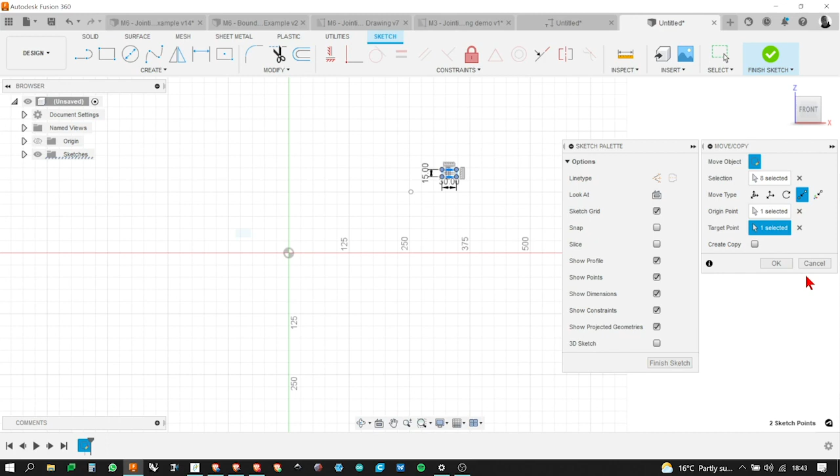That's very super fast, yeah. So I like those kind of questions. Ones I can actually answer as well are good.

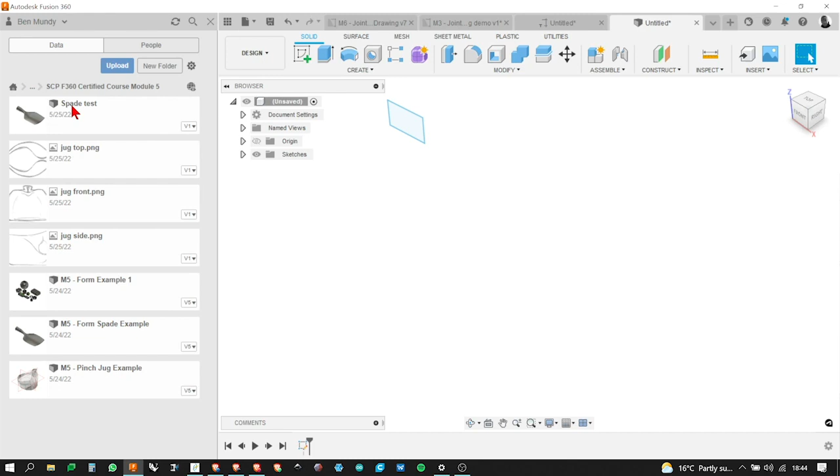Let's do laser cutting. I'll just try and pick up a useful example that actually makes sense. Let's go back to this one. Say, for instance, we wanted to pick up this design here from above, and we wanted to turn that into a DXF ready for laser cutting.

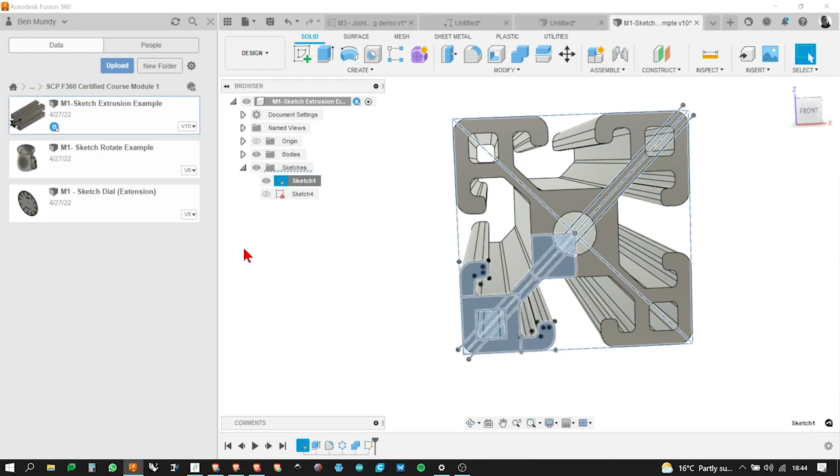What you can do, we can always turn on any of our sketches. We've done it here, we can look at this sketch. I can right-click on any of these sketches and save as a DXF from this point. But what if I save this as a DXF now? If I turn that off, this is what you'll get, and that's not what you want for laser cutting. It's got too much information and not enough information. You just want the outside line, basically, or the information that you want.

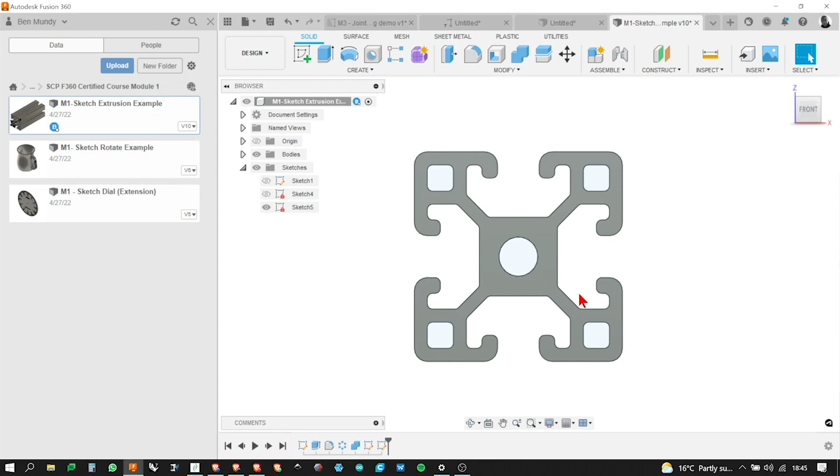So the way to do that is quite nice, actually. Navigate to the view that you want, and if we go to create sketch, and if I just click on the face that we want to create a sketch on, click on that once, and then finish the sketch, that's all we're going to do. It will automatically pick up - it's turned slightly blue - it's picked up all that geometry just by clicking on that. If I right click on that now and save that as DXF, let's do it, and you can see hopefully.

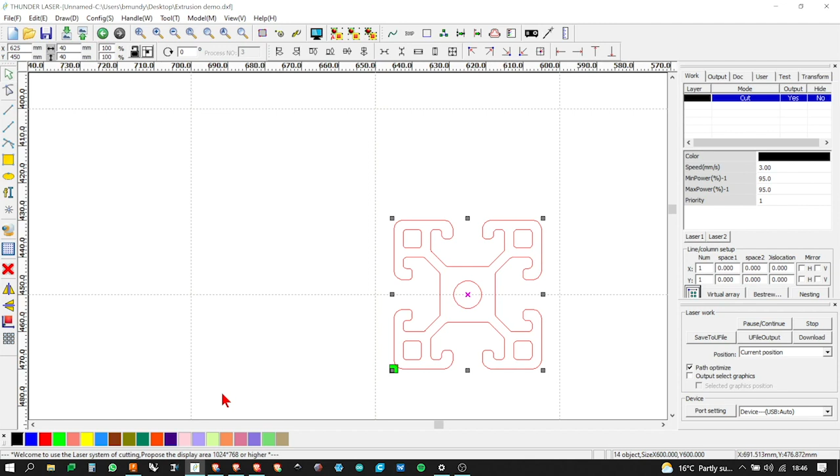If I go into the laser cutting program, which I happen to have open, and import it in, through the horrible dialog boxes there, through demo, you can see it's just brought in just the information that we want. It's a really nice trick that Fusion does, it makes it super quick. The only downside is that if you have multiple parts, it'll only pick up on the surface you've clicked on.

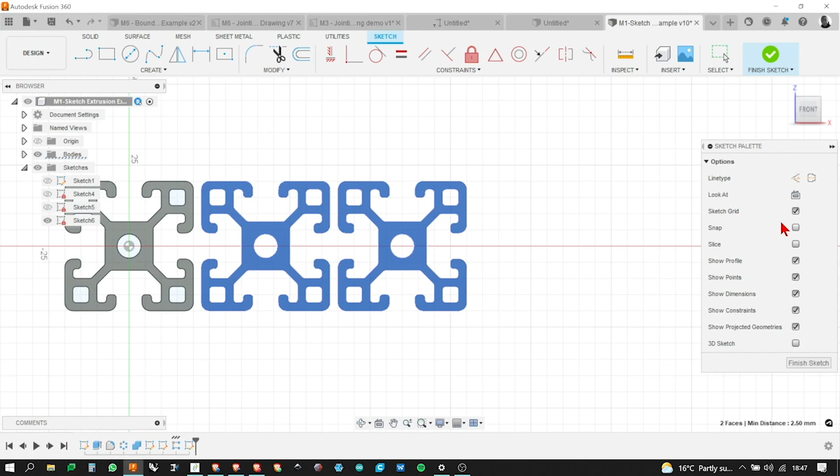So, to do that, let's just create that problem. Rectangular pattern, I'm just going to make a copy of this. Say we wanted that, something like that, laser cut, 3 of them. When I go to create my sketch, I'm going to click on one of them and it will pick up that information. Next, I'm going to go to project. I'm going to just hit P on the keyboard and make sure I hover over it so the whole thing turns red. Click on that once, click on that once, and now finish that sketch. All those 3 will then be available as one DXF, and you can bring that in one go. So that's the way to quickly just extract that sort of surface information for laser cutting. So that's where I go.

Within Fusion, you can run laser cutters from within the manufacturing workspace. We haven't got round to doing that yet, because we like our Lightburn software, it can do a whole heap more than Fusion can do when it comes to working more creatively. So we tend to extract stuff that we want, chuck it in Lightburn and do other stuff to it. But you can run laser cutters if you set them up properly out of Fusion. What I did for you, we're going into the manufacturing workspace, which is probably about another 4-day course in itself, really, to sort of understand. But that's where you can run obviously all the CNC machines from that. Not something to be covered in the next 5 minutes, unfortunately.

Any other questions? I've got one other miscellaneous thing, and it's really useful for those doing the exam, which I'll show you. Is there any other sort of general questions you want to look at?

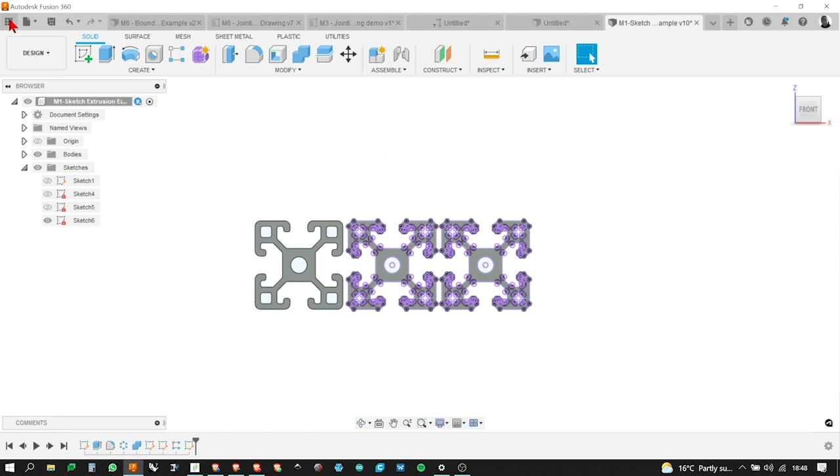Okay, so there's one more example. Let's go back to this one here, and just going to click on boundary fill example. This is another feature which is a little bit of an odd feature within Fusion, but I know it pops up in the exam occasionally, so I just wanted to show you this particular feature. I never use it, but it's something you may want to use at some point.

So let's just show you what it is and what it does. So here I've got a shape, let's have a look at it. It's a revolved shape. This is the profile that the revolve's created from, and that's just a standard 360-degree revolve.

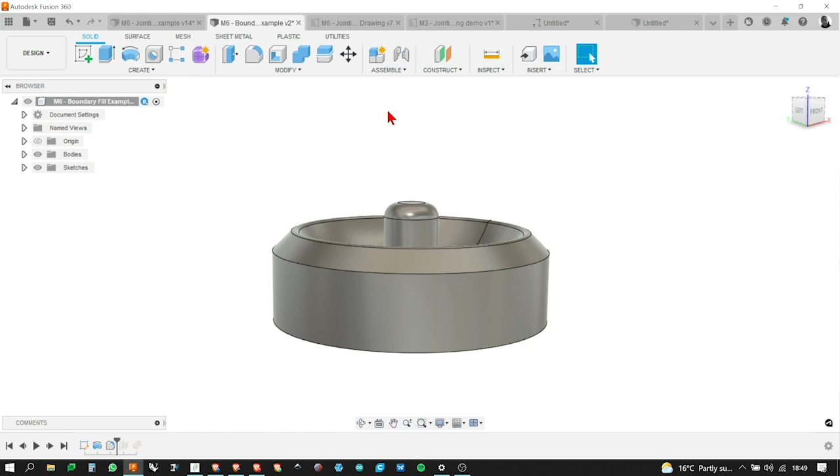I'm going to create that plane. So we can see that plane is intersecting. So that offset plane, I brought it up 15 millimeters, and you can see it's cutting through that curved shape.

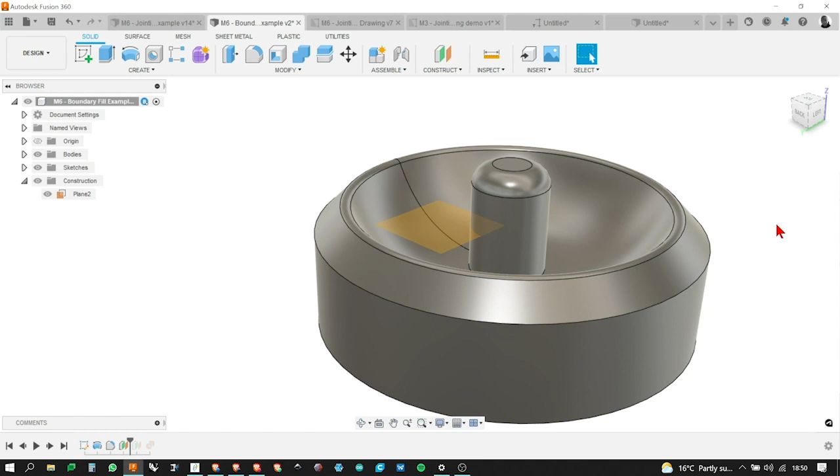So a boundary fill will basically, it's kind of a bit of a shortcut, I suppose. You can basically tell Fusion to fill up to that point. That's all a boundary fill does. It's in the create menu, right down almost at the bottom, boundary fill.

And I click on this, and basically it's asking you what do you want to fill, what's the general shape you want to work with. The tools are this one here and the plane we want to use. Then we need to select the cell, the bit that we want to fill in. And the bit that we want to fill in is this middle bit here, in between the bottom of that curve and that plane.

We can't actually, if we tried to fill in all the rest of it, it wouldn't necessarily work. There are limitations of what you can do. I mean, you can fill in that part, but if you try to fill in other parts, it's not fully contained, so it won't let you fill it in.

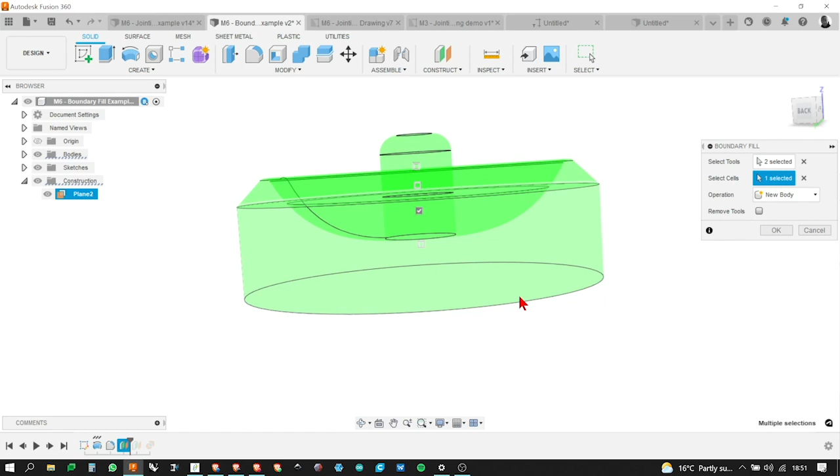From this point, you can create a new body. So it can be a separate body, it can be a component like anything else, or you can join it, should you wish. You can also remove tools as well. So it's another way of kind of intersecting things. It does a similar thing as a lot of the other features, but in this kind of little shortcut way. I'm going to click OK, and you can see it's just filled in that space up to that plane.

So, can you use anything as a tool? It doesn't have to be a construction plane. You can use anything as a tool, as I understand it, but a construction plane is quite useful because, logically speaking, why would you do this other than a combine or an intersect using the combine tool or the cut tool?

So it's kind of just a quick way if you want to do something. The plane's the obvious way, perhaps, of doing this without having to go back into a sketch or draw a whole other thing. It seems to me a bit of a shortcut, which I always forget's there, so I never really use it. But it does pop up in the exam, a question about boundary fill. So I just wanted to show everyone that it's pretty straightforward, but slightly different to the rest of Fusion in the way it works. It's not driven by a sketch, it's not an extrusion, revolve, or anything like that. It's a bit more like combine, intersect, and join feature. So sorry that's tacked on right at the end, but it's only really relevant to those.